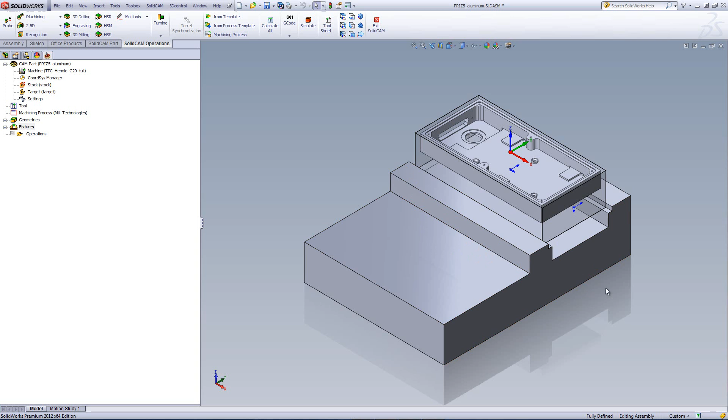In this session, we'll be showing you the perfect machining combination using iMachining 3D and HSM. Let's first take a look at the part on our screen. This is a prismatic part typically used for electronic components.

We have this through hole to drill, so I'm going to drill that out. Then I'm going to do all the rough cutting using iMachining 3D and a finish cut using HSM.

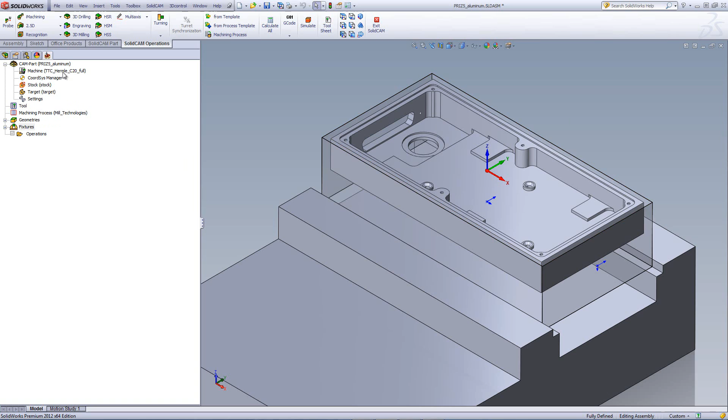We'll start off with the first operation, drilling. I'll choose my geometry, that hole over there, and I'll choose my drill - in this case a 16 millimeter drill. For levels, I'll be going through the entire part with an extra millimeter, going through using the full diameter of the tool, and I'll just do save and calculate.

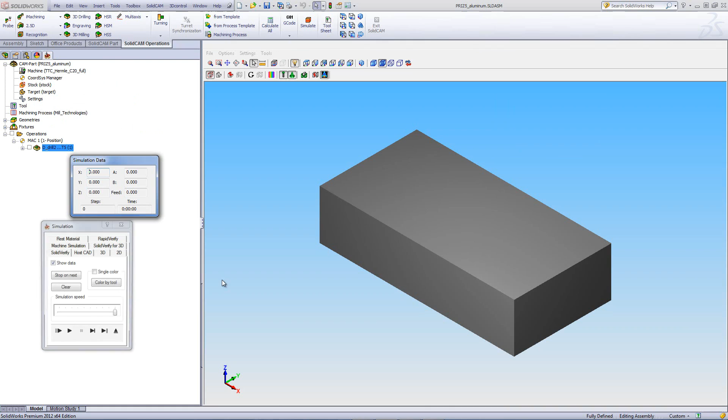Now, if I run my simulation using SolidVerify, you'll note that the tool goes down into the material over there. For my next operation, I'm going to use iMachining 3D.

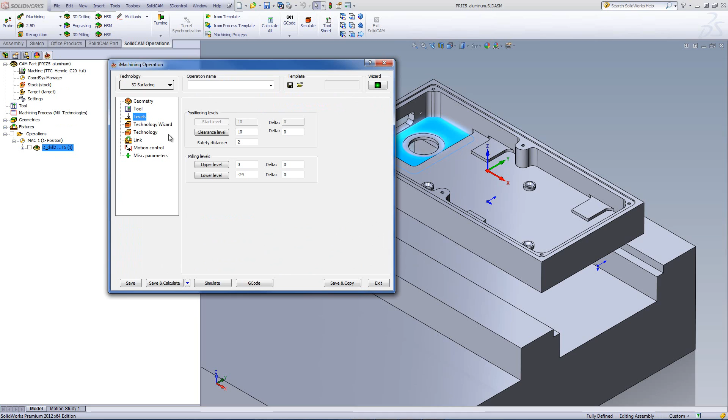As I start the new operation, you'll note my target is automatically inside my geometry box. The tool I'll be using will be a 12 millimeter bullnose tool, and I'll use it on the entire part, going all the way down to the bottom.

In my technology wizard, since this part is aluminum and is being held firmly in the vise, I'll go into modify cutting conditions and choose turbo mode. The wizard will give you the correct cutting conditions at every point, and that gives you first part success every single time.

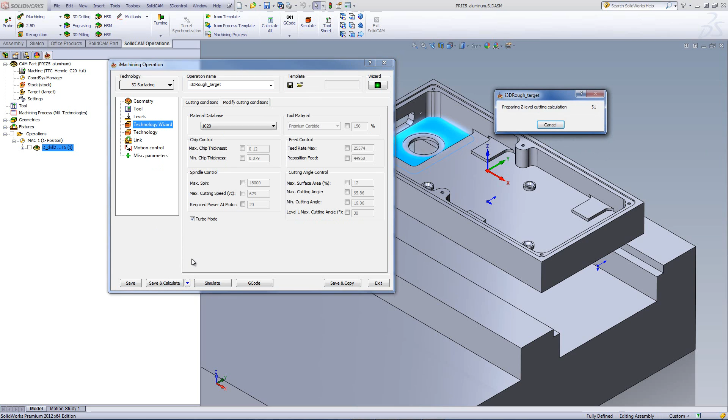All I'm going to do right now is save and calculate using all the defaults in the program. Now let's run a simulation and note what happens.

First it starts by going on the outside, and then when it goes on the inside, it automatically goes inside the hole itself. It recognizes there's no material there and actually uses that hole as an entrance for the pocket area - and this I did not have to define within the operation.

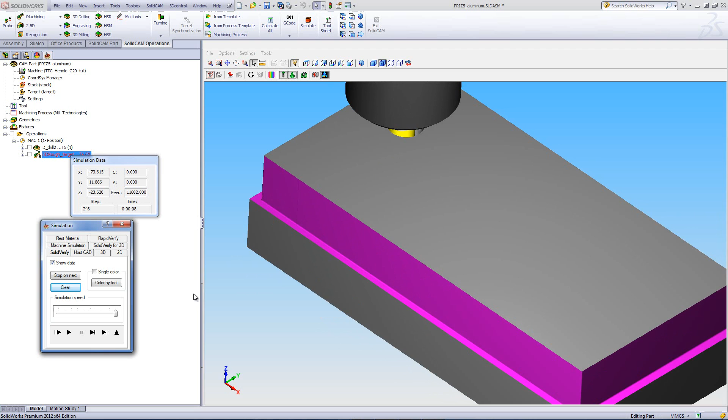It knew this automatically. As we continue, you can see the iMachining toolpath that's so famously known from our 2D operations now being used in our 3D operation on this prismatic part.

One major advantage using it on the prismatic part is I do not have to go and define each depth of each pocket individually in individual operations. This is done automatically within one operation, completing this entire part using 3D iMachining Rough.

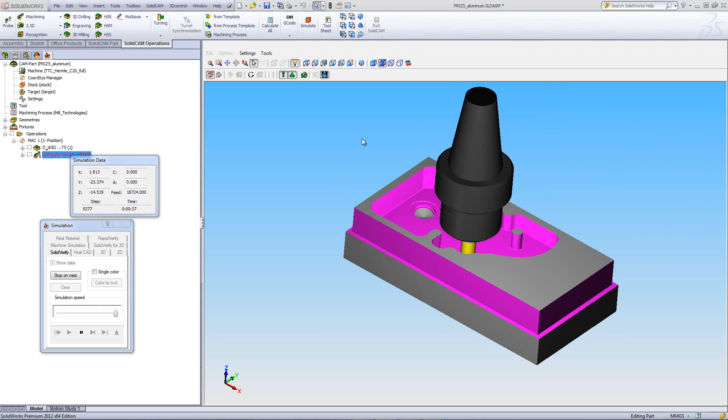As you can see, it cleans out every single corner, then cleans off the next steps as shown here, going on its way up, always manipulating the full length of the tool whenever it can. It even does this top step as shown here.

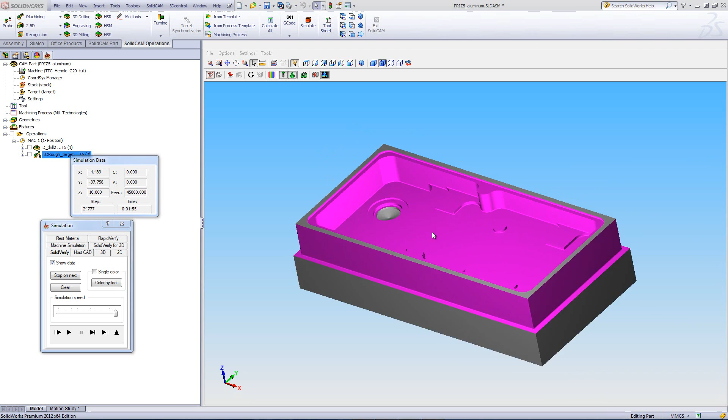Now note that because this was a large tool, a 12 millimeter tool, there are areas within this part that could not be machined because the tool was too large to get into the corners.

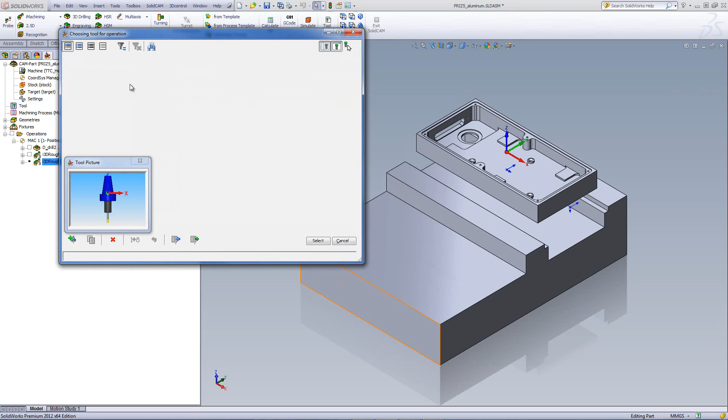So to complete this task, we simply do save and copy to create a new 3D iMachining operation, and all I'll do is go into my tool area and change to a new tool - a 6 millimeter bullnose end mill.

All I'll do right now is save and calculate. It'll automatically recognize that the material has been machined already, and it'll work only in the areas where the previous 12 millimeter end mill was not able to go.

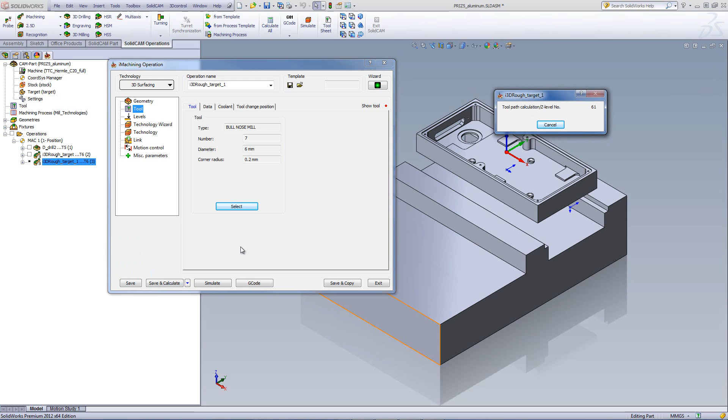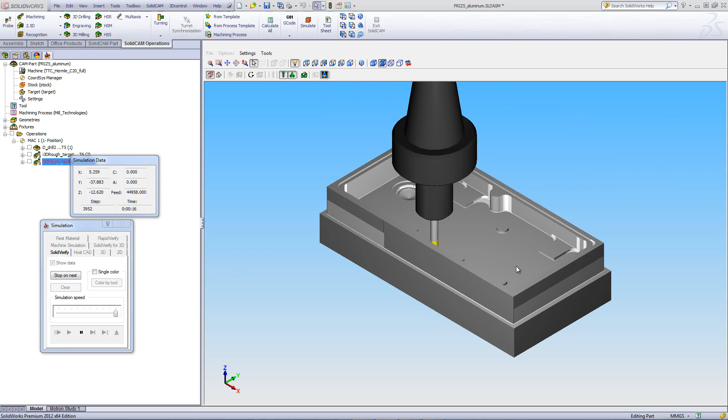If we take a look at our simulation, you'll see that the tool will only work in the areas where the previous tool was not able to work, clearing out this corner, these corners inside, as well as parts on this wall and in these other corners. You'll note it's only working in the areas the previous tool could not machine.

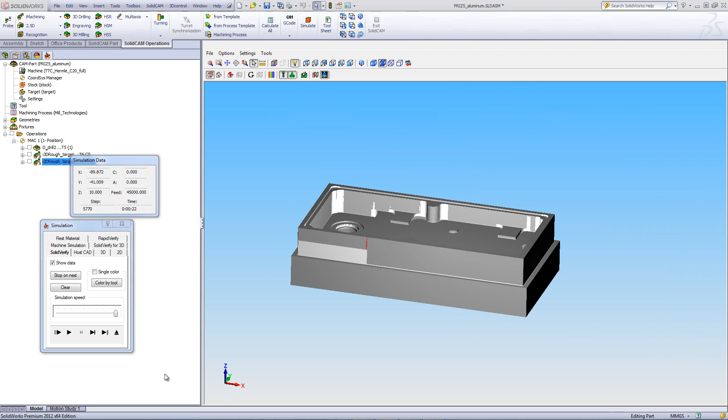Now it should be noted that the time for these two operations was 3 minutes, compared to 41 minutes when done in the conventional method.

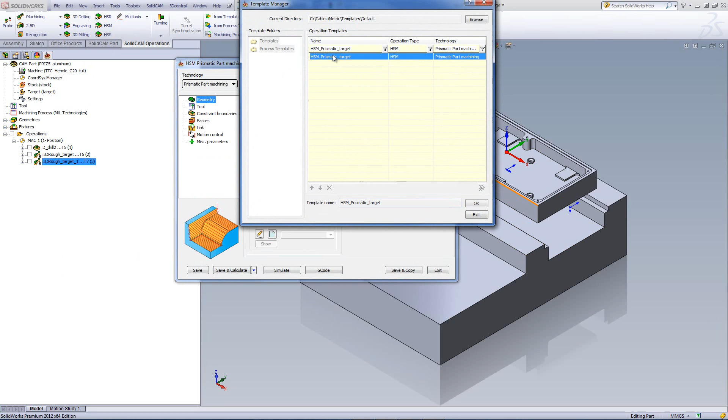Now for finishing this part, I'll go into HSM and use the option of Prismatic part machining, specifically made for parts such as this. I even have a template ready for this particular operation using a 6mm end mill.

My passes are going down every 5 millimeters and stepping over every 3 millimeters, and we'll do save and calculate.

Now when we take a look at our simulation, you'll see that it'll complete this entire part with all the proper step downs and every single floor, all done within one operation. So programming this part was done very simply using 3 major operations plus 1 drilling operation for the hole.

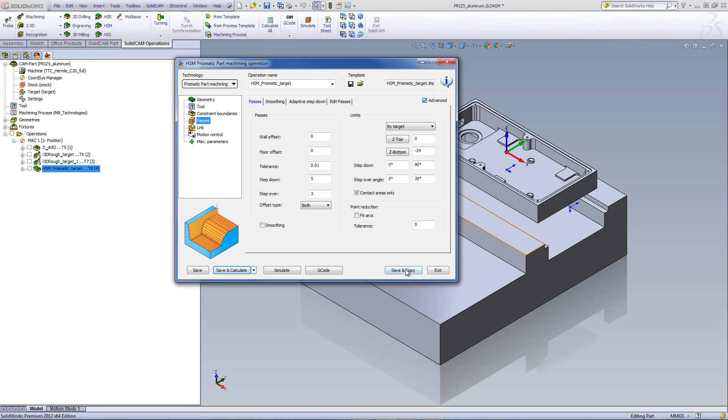If we take a look at the simulation now, you'll see the tool working on the floors, starting from the very top, then working on the outside, going down every 5 millimeters, and now working on the inside, clearing that first step as shown, cleaning each step as it goes down, and now working on the wall.

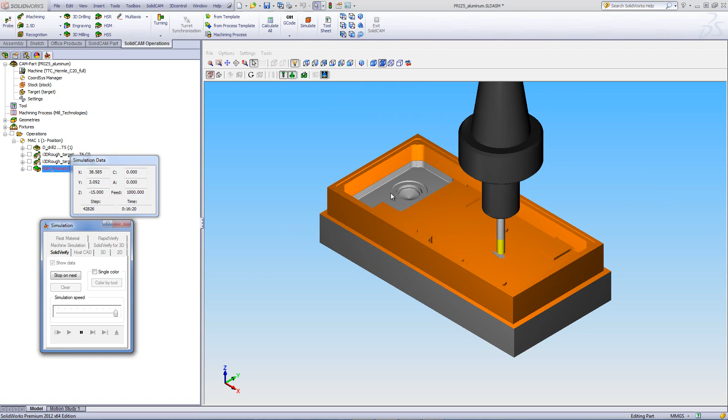When it gets to the next floor level, it'll clean off that particular floor as well, as shown on these floors, then moving on to the next floor, clearing it off, and then when it finishes this floor, it'll go into the pocket area, finishing off those areas as well as these stepped holes, finishing off the entire part.

This entire part was done using iMachining 3D and HSM - the perfect combination.